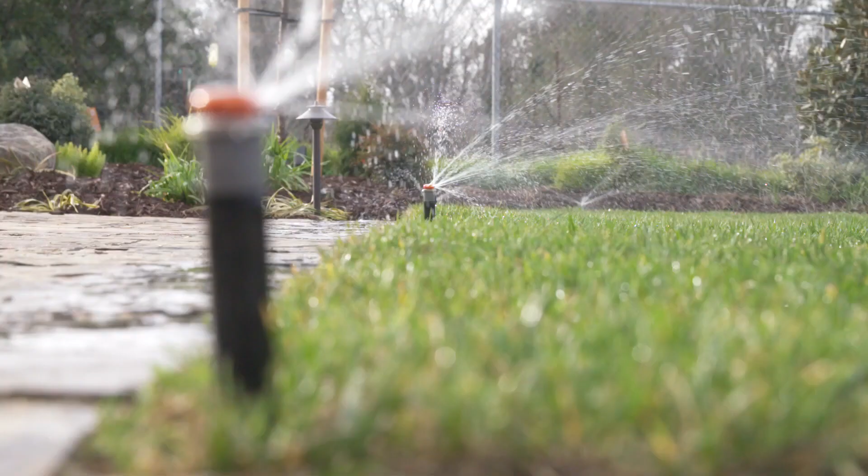A professional automatic irrigation system is designed to ensure different plant types get the correct amount of water they need. Automatic irrigation systems save time by letting the technology handle the routine and time-consuming process of watering landscapes. A modern system saves money by adjusting watering schedules automatically when the weather changes.

A professional irrigation system prevents tripping hazards by moving the water throughout the property while being out of sight and out of mind, with no messy hoses laying around for someone to trip on. And being underground, the system of pipes and spray bodies are protected from seasonal weather and routine maintenance.

The main reason for having an irrigation system is to help provide a beautiful landscape. This can increase property value and have a positive effect on your quality of life. Now, let's go through and identify the components of an irrigation system. An irrigation system is comprised of many components. Each component serves a unique purpose in the functionality of an irrigation system.

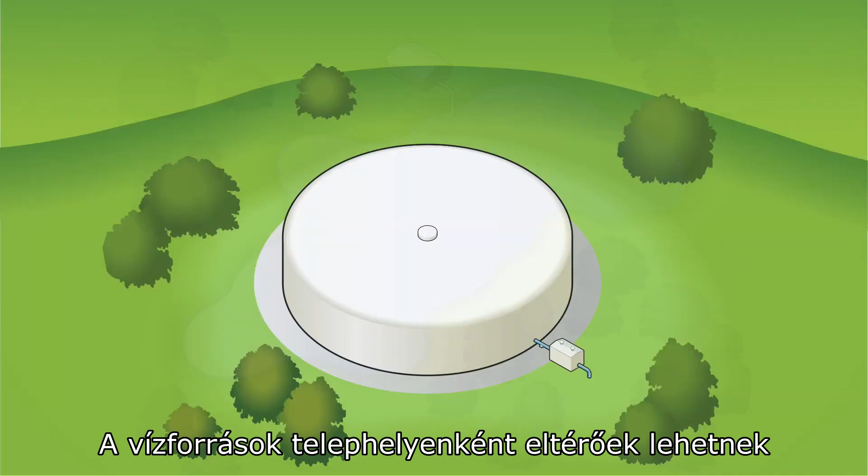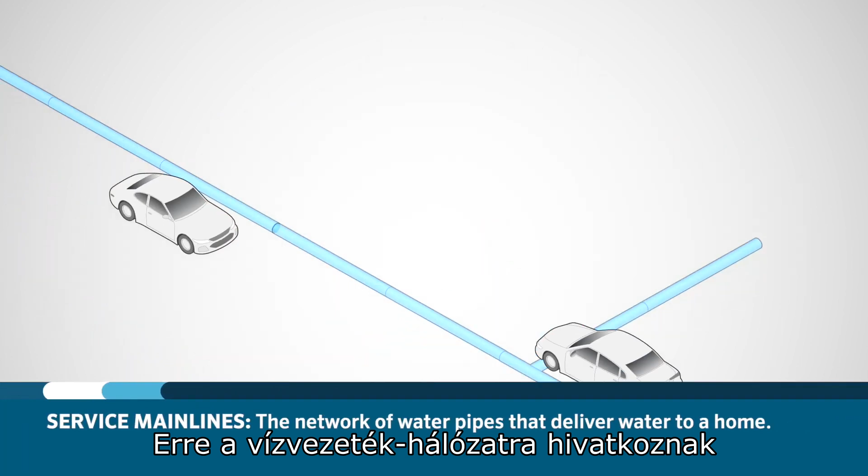All irrigation systems require a water source. It may seem obvious, but it will be very important to know where the water is coming from, so make sure to verify the water source before beginning your installation. Water sources may vary from site to site and region to region. The water source might be delivered in a network of pipes that run under the roads that we drive on every day. This network of water pipes is referred to as service main lines.

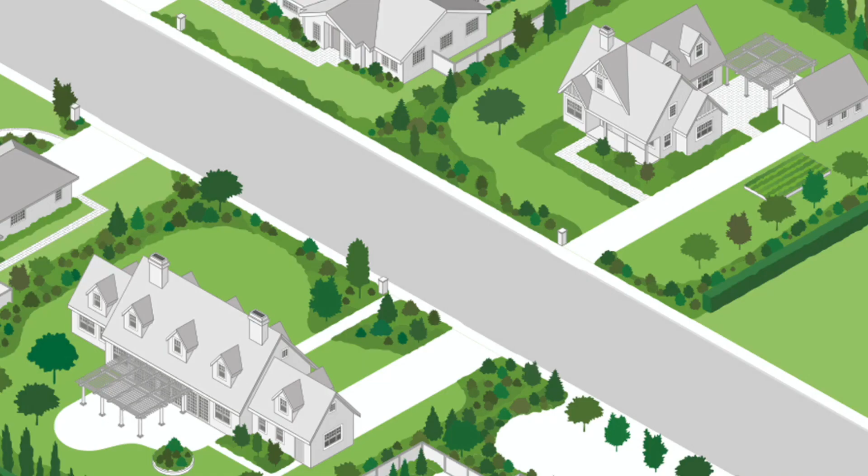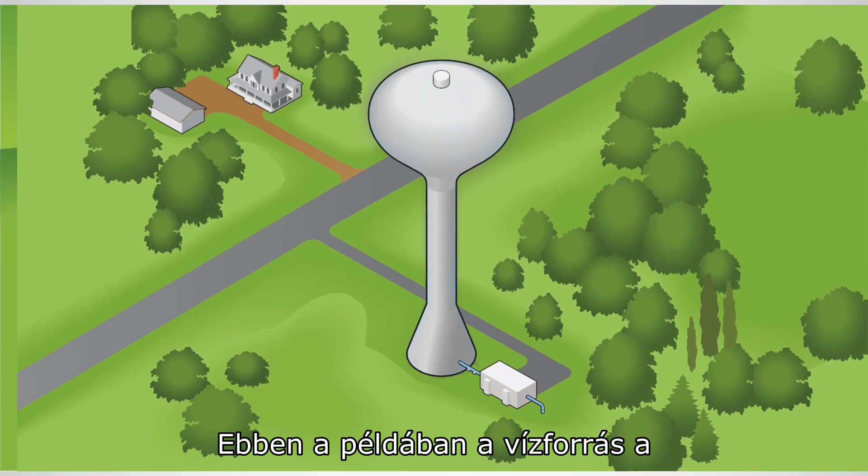Water can also be pulled from the ground or surface water sources like ponds, lakes, streams, and rivers using pumps to create the pressure needed to operate the sprinklers. You may have a municipal connection, like a metered potable water service or a metered recycled or reclaimed water service. In this example, the water source is a municipal metered potable connection.

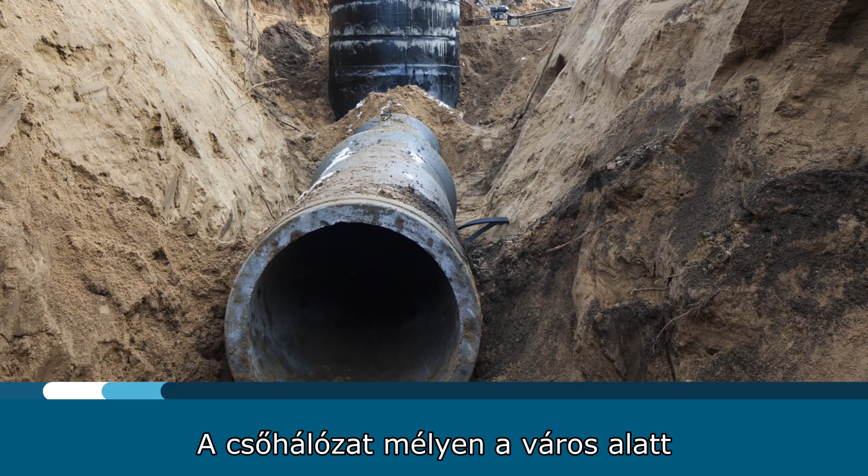With a municipal supply, pressure is created in the water supply lines by pumps or by gravity-fed supply tanks on hilltops or water towers you see throughout cities. These are maintained by the supplying agency. The network of pipes deep under the city or county roads service homes, commercial properties, and fire hydrants. These pipes are usually very large and typically range from about 2 to 36 inches.

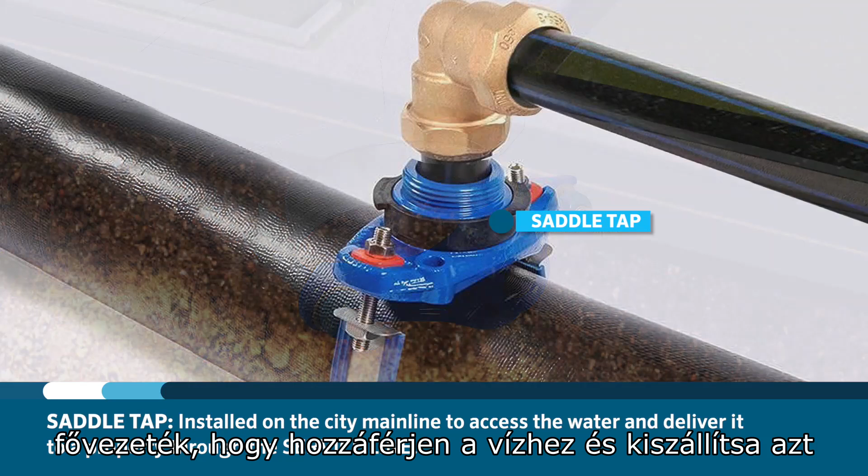These are called municipal main lines and may often be referred to as city main or main line. A saddle tap is installed on the city main line to access the water and deliver it to a property through the service line.

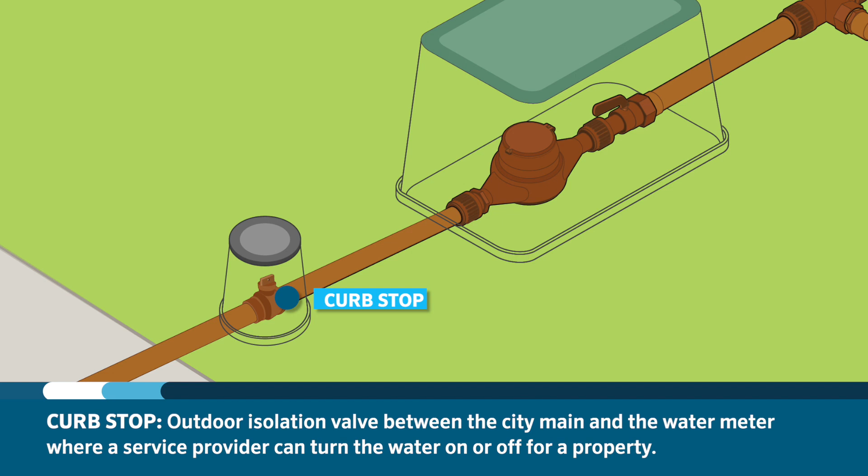Between the city main and the water meter, you may find a curb stop. A curb stop is an outdoor isolation valve where the water provider can turn water on or off for a property. This is usually found in a valve box just inside the property line. In cold weather climates, this valve is deep in the ground below the frost line. The water then passes through the service line to a water meter.

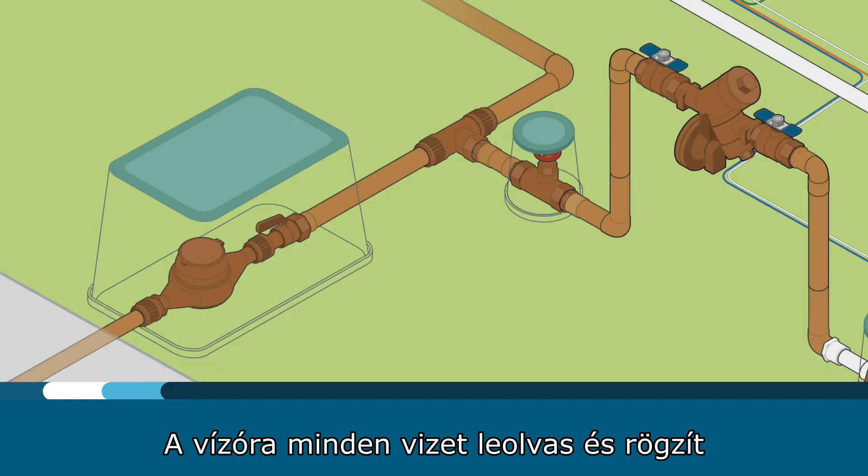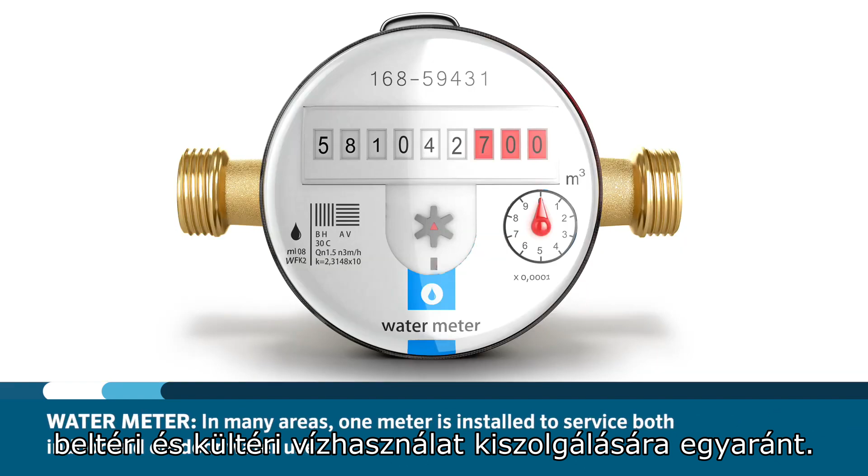So what is a water meter? The water meter reads and records all water being used on the property. Before the water can be used on the property, it must pass through a water meter to track the quantity of water used inside the building or out in the landscape. In many areas, one water meter is installed to service both indoor and outdoor water use. Other areas may require installation of 2 water meters, one for indoor use and one for outdoor use.

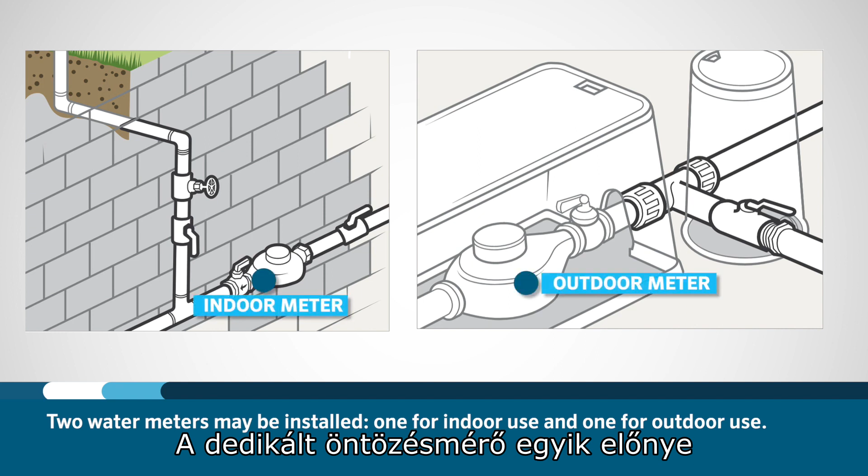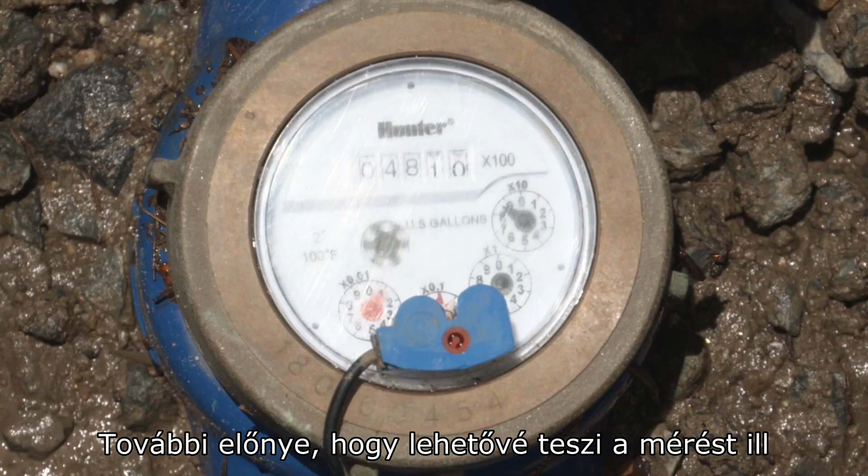One advantage to having a dedicated irrigation meter is to eliminate costly sewer fees commonly incurred with indoor water use meters. This is because water that enters the home is assumed to leave the home and go into the sewer system, and water used by the outdoor irrigation system is assumed to stay in the landscape. Another advantage is that it allows measurement and therefore better management of landscape water, maximizing efficiency and helping to ensure a beautiful and healthy landscape.

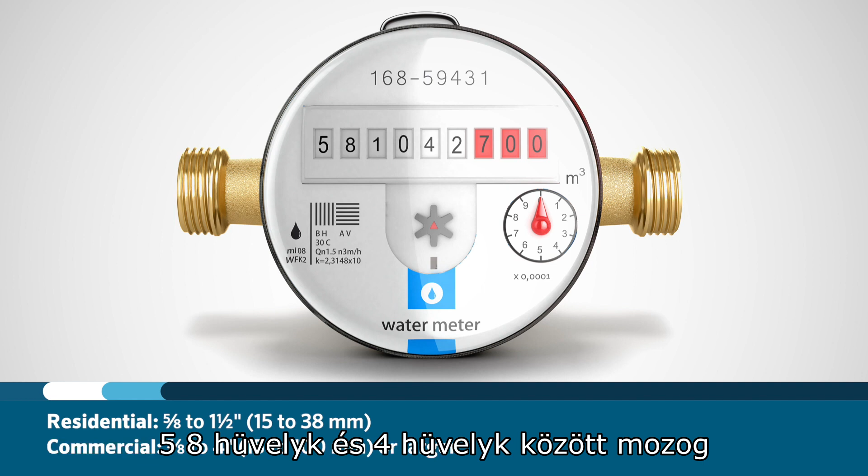Meter sizes range from 5/8 inch to 1.5 inch for residential properties and can range from 5/8 inch to 4 inches or larger for commercial irrigation systems. A typical warm weather installation will have a meter box where water comes from the city main through the water meter to the delivery line.

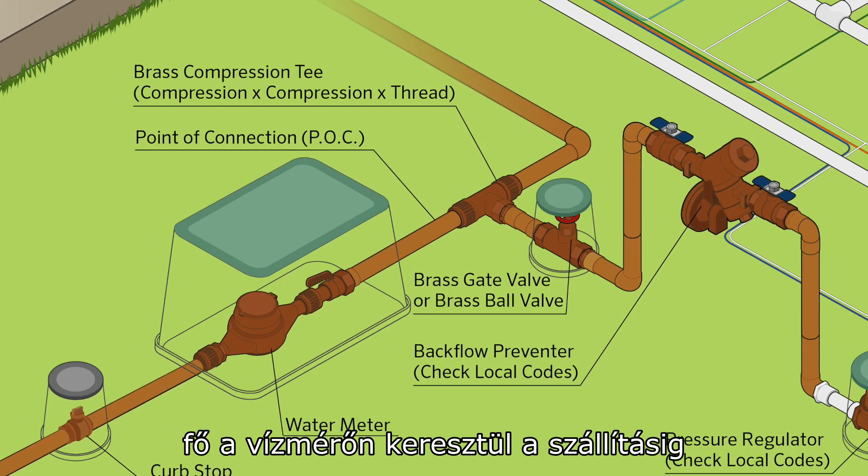For cold climates where freezing temperatures are likely, the water meter may be placed inside the building. After the water meter, the water moves through the delivery line to provide water to the house or building.

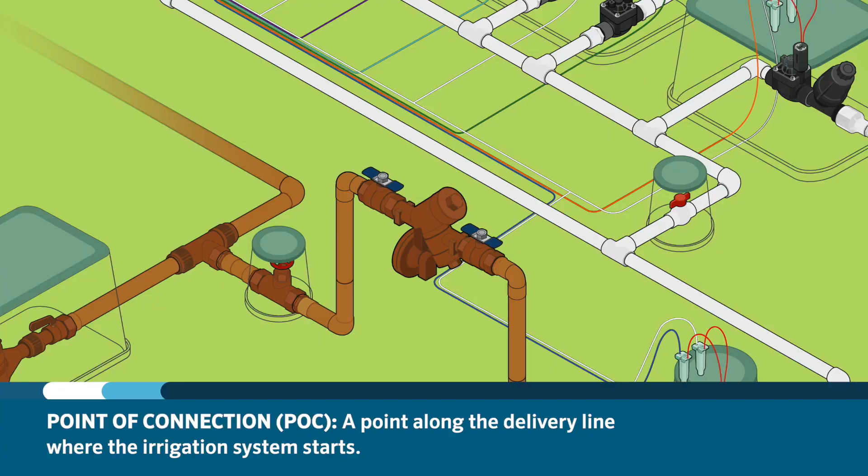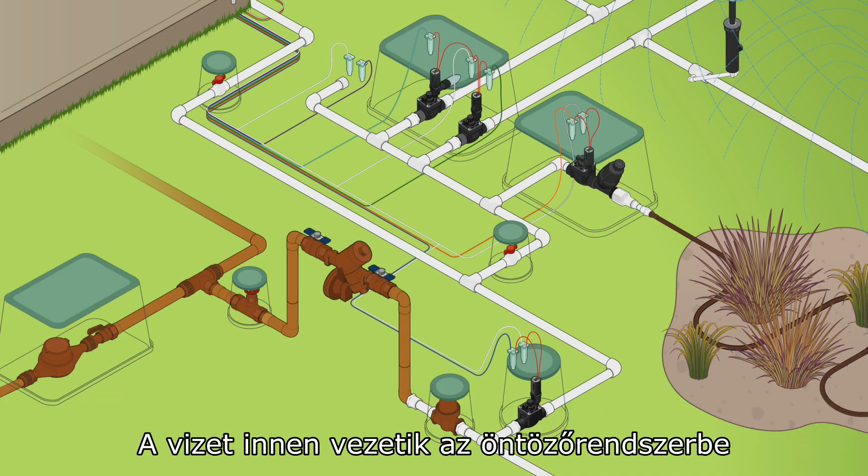A point along the delivery line is chosen to be the point of connection or POC for the irrigation system. Typically, this is where the irrigation system starts. Water is directed to the irrigation system from the delivery line that supplies water to the home or commercial building. This will be different if the irrigation system has a dedicated water source separate from the meter to the home.

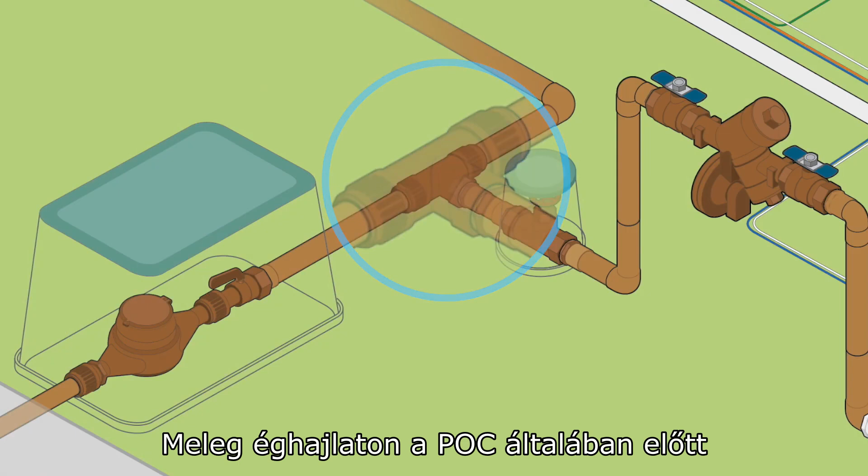In warm climates, the POC is usually before the building, and in cold climates, the POC could be inside the building. At this point, a compression or slip tee is installed at the POC. The tee can be made of various materials. Check your local codes for the appropriate type used in your area.

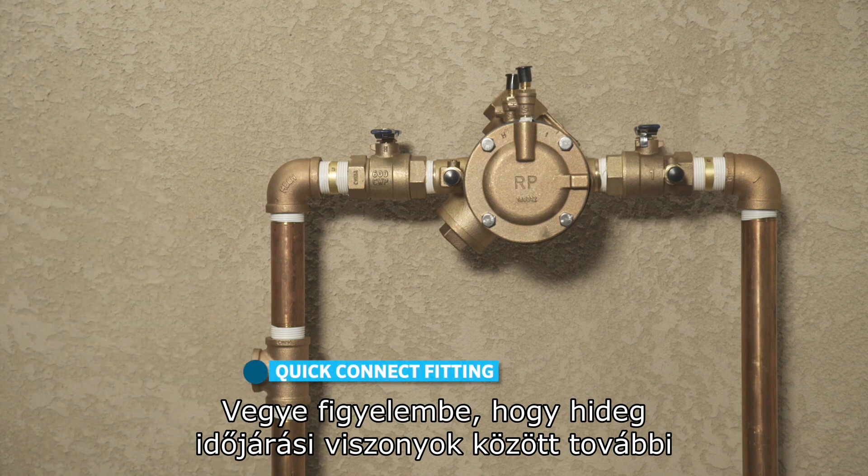Note that in cold weather climates, an additional quick connect type fitting and drain valve should be added to the point of connection for winterizing the irrigation system.

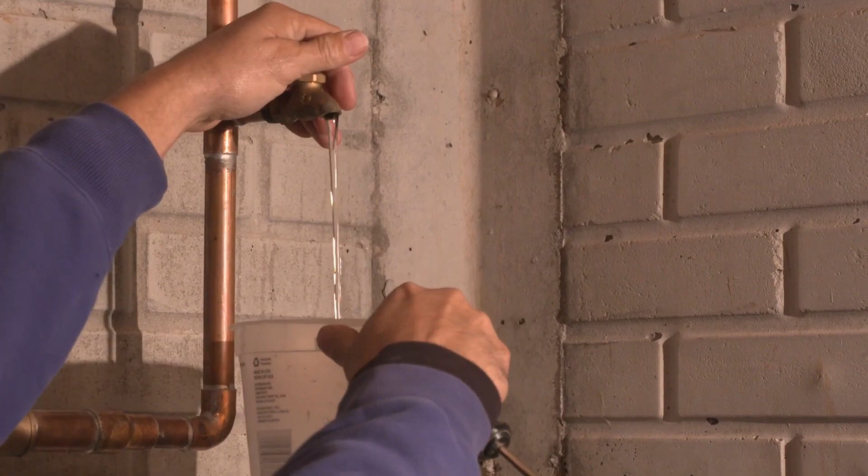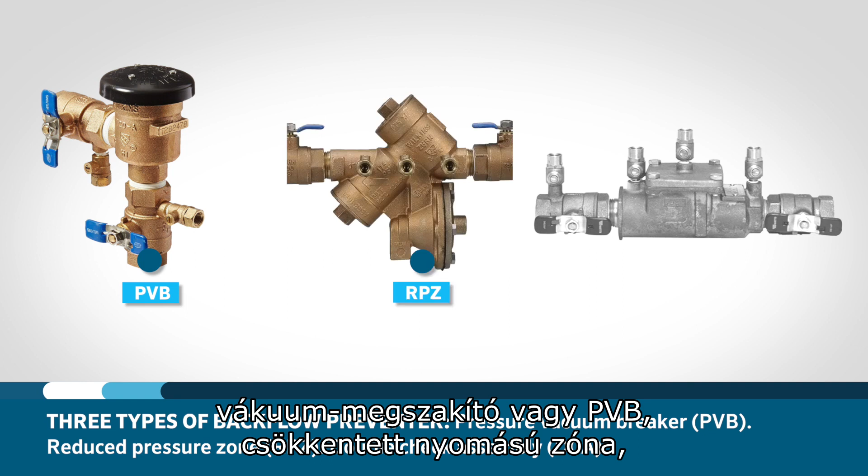Most cities require the use of a device known as a backflow preventer to prevent contamination of the potable water source by ensuring that no water that has been directed to the irrigation system can make its way back to the delivery line or municipal service line. The three most commonly used are a pressure vacuum breaker or PVB, a reduced pressure zone or RPZ, and a double check assembly or DCA.

After water passes through the backflow prevention device, internal check valves prevent water from flowing in the opposite direction. The installation of this device is often required by local code and typically requires a licensed professional. Check your local code to determine which backflow prevention device is required for your system.

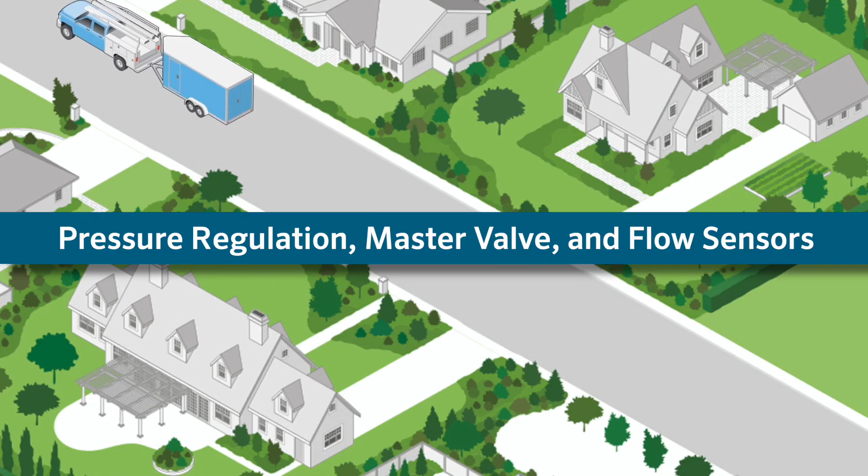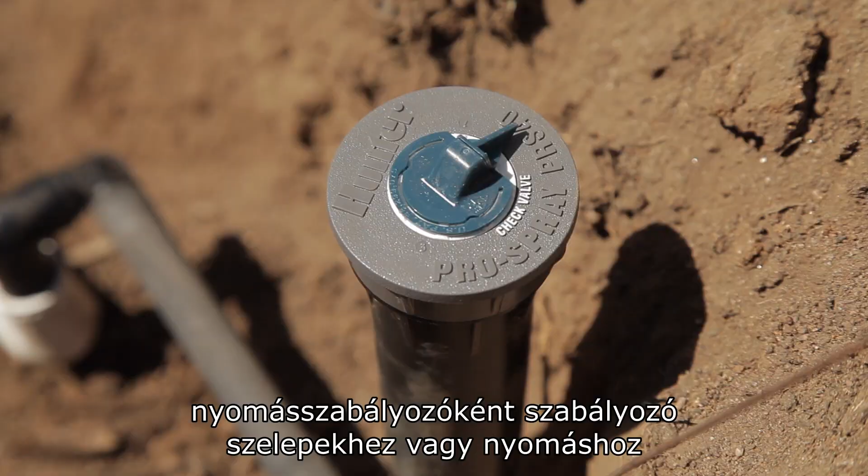After the water meter and the backflow preventer, there might be a pressure regulator to regulate the pressure to the entire system. A pressure regulator should be installed if the incoming pressure is much higher than the system requires. There are other products that can be used in the system to help regulate pressure, such as pressure regulators for control valves or pressure-regulated sprinkler bodies, but those should not be a substitute for pressure regulation at the point of connection.

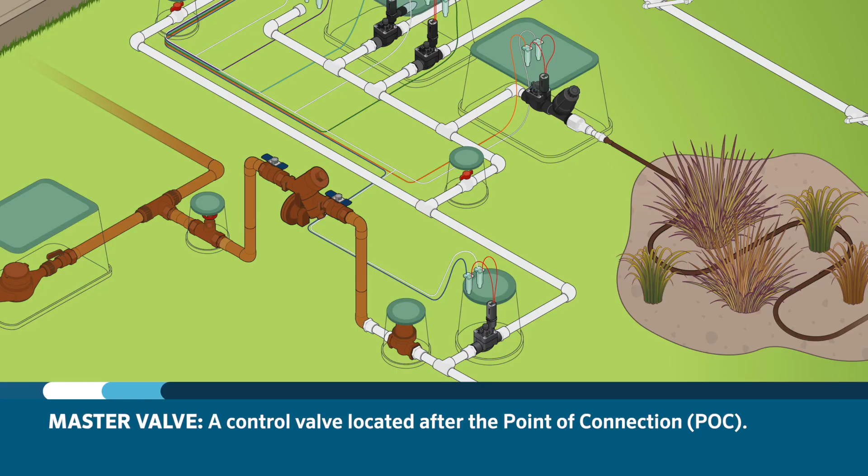After the pressure regulator, an optional and highly recommended device known as a master valve can be installed. The master valve, in most cases, is simply a control valve located after the POC. There are both normally open and normally closed master valves. Since a normally closed master valve is the one most commonly used in smaller irrigation systems, we will be referring to that type during this training.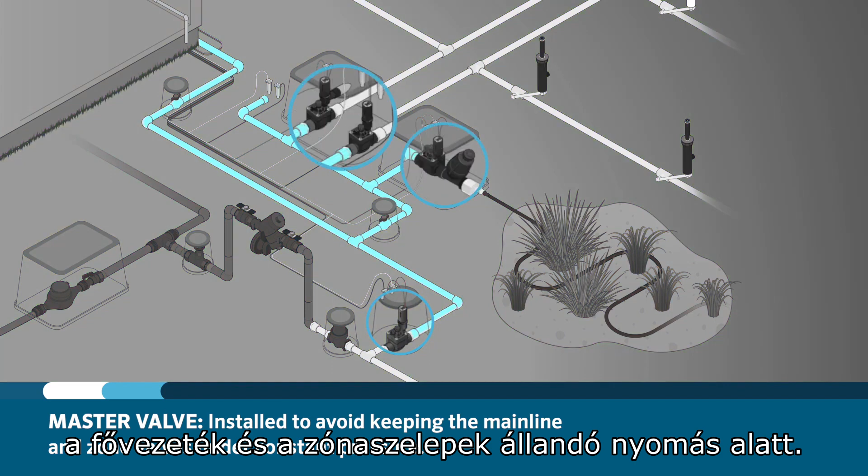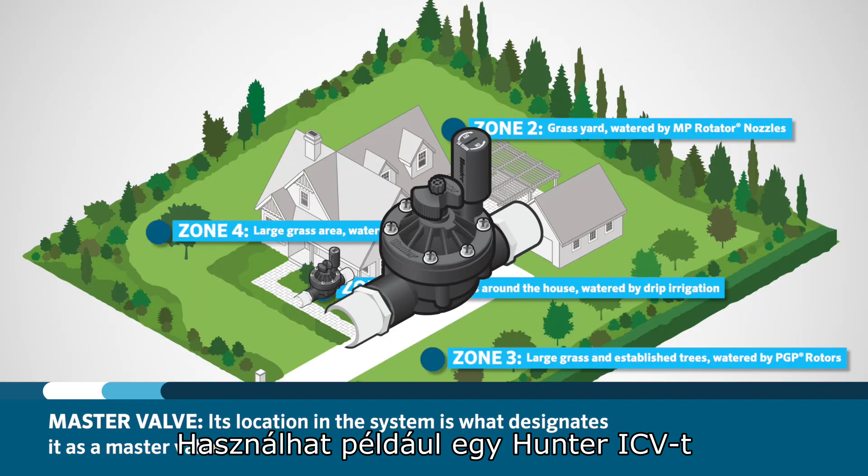A master valve is installed to avoid keeping the mainline and zone valves under constant pressure. We do this to prevent damage to the property created by irrigation mainline leaks. Its location in the system is what gives it the designation of master valve. For example, you may use a Hunter ICV for both a station valve as well as a master valve. The master valve must activate simultaneously with any station valve for water to flow through the system.

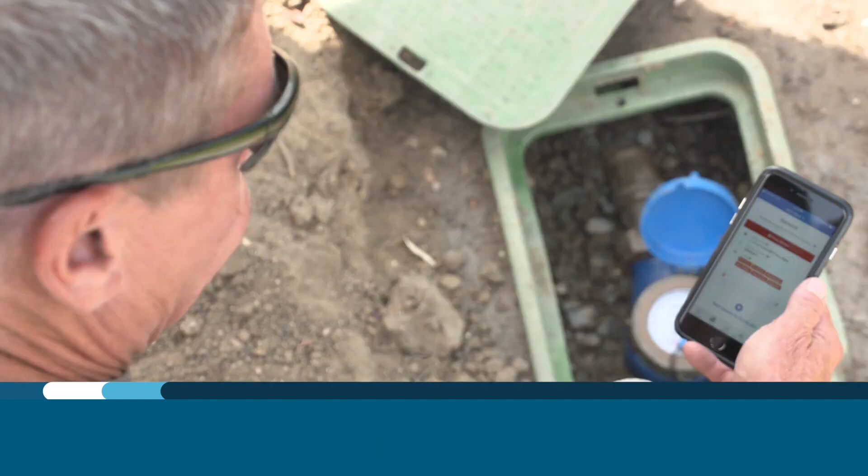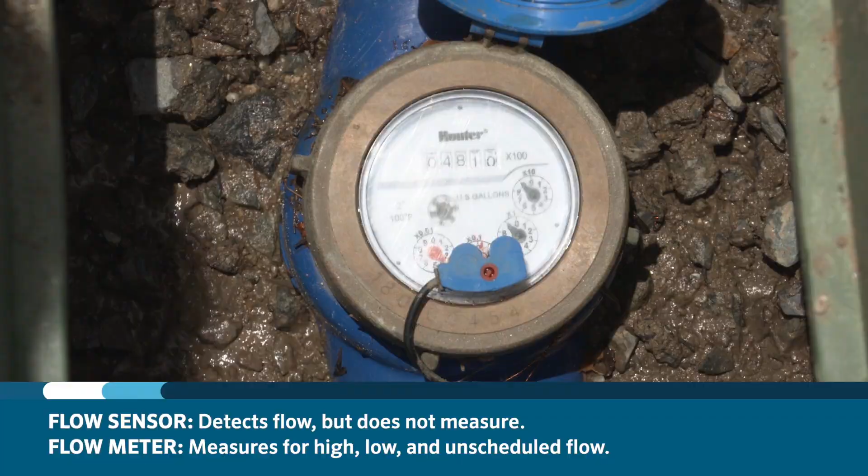Another highly recommended device, known as a flow sensor or flow meter, may be added to the system to monitor for high, low, and unscheduled flow. A flow sensor or flow meter, in combination with a master valve, can help to identify failures in the piping system and shut down the system, preventing water waste and high water bills.

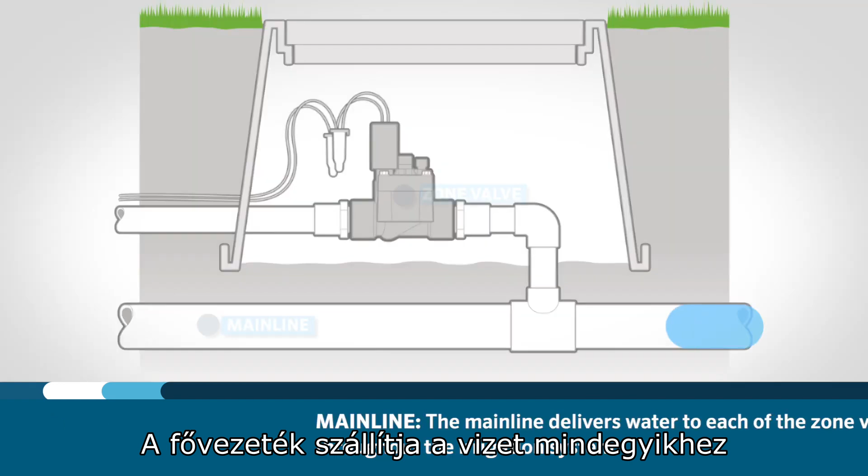Downstream of the master valve and flow sensor is the sprinkler mainline. The sprinkler mainline is the largest pipe in the irrigation system. If there is no master valve, this pipe is typically under constant water pressure at all times throughout the entire site 24/7. The mainline delivers water to each of the zone valves throughout the irrigation system.

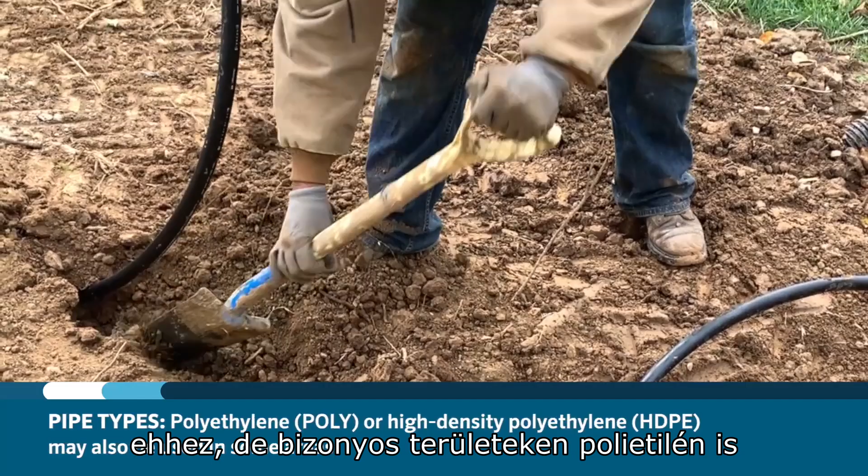PVC pipe is the most commonly used pipe for this, but in some areas, polyethylene, also known as poly, or high-density polyethylene, or HDPE, might be used. If a normally closed master valve is installed, the mainline only remains under pressure during scheduled irrigation cycles.

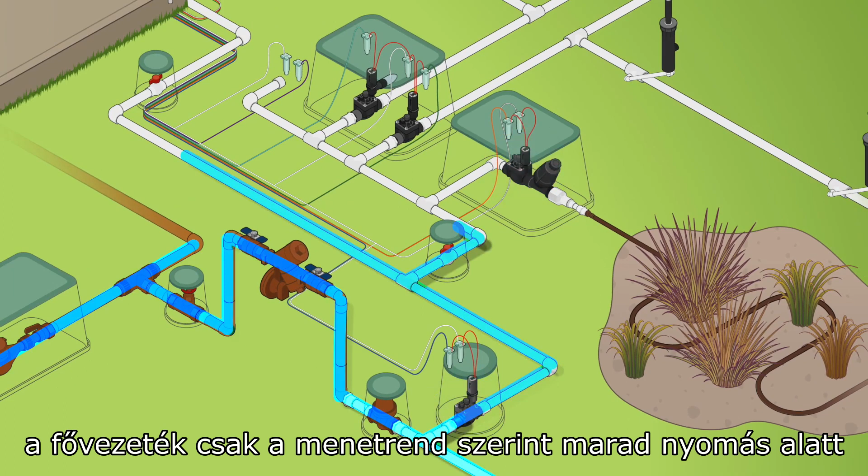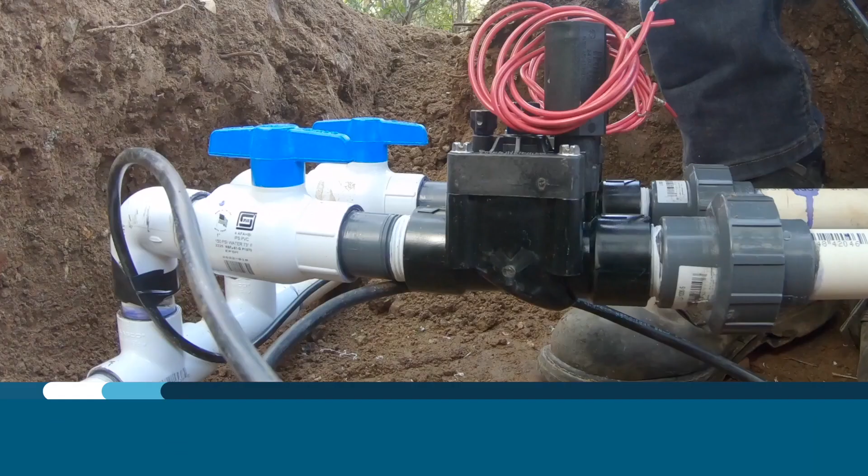Along the mainline and before the valve manifolds, it's recommended that shutoff valves be installed to isolate sections of the system for maintenance and troubleshooting. These are generally the same size as the line they are on. They can be made of PVC or brass depending on the system design and specifications.

The mainline connects to the valve or valve manifolds. Valve manifolds are a grouping of valves that control water flowing through the zone or stations on a property. Sometimes these are called automatic control valves, remote control valves, or electrical zone valves. Electrical zone valves are installed to control the water flow to the sprinklers in each zone.

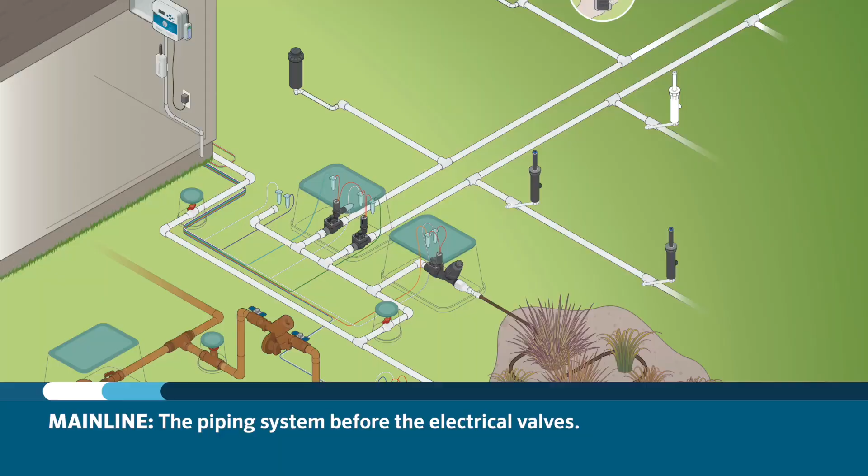Only when the controller sends a 24-volt alternating current electrical signal to open the particular valve will that valve open and allow water to flow from the main line through the lateral lines to the sprinklers or emitters. The piping system before the electrical valves is referred to as the main line, and any pipe system after the electrical valves is referred to as lateral lines.

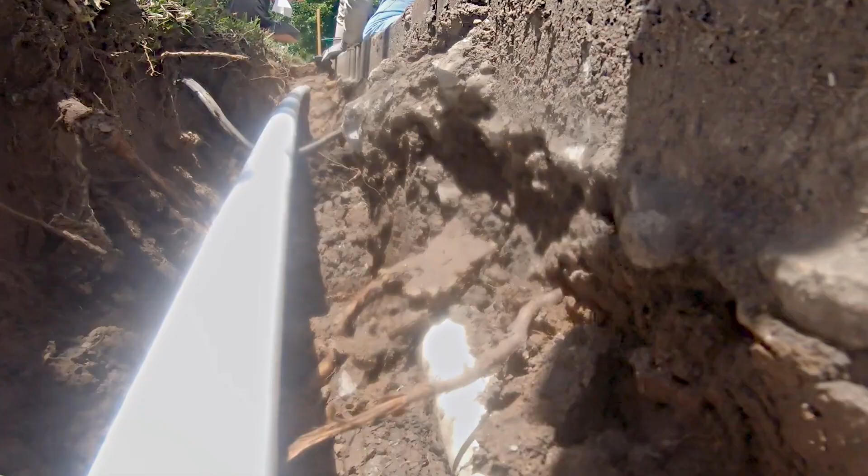Lateral lines connect all the sprinklers on one zone and allow the water to flow from the valve to the sprinklers in the zone. When the valve opens, the lateral line fills up with water and the sprinklers pop up, or the drip lines are filled with water and build pressure to activate the emitters.

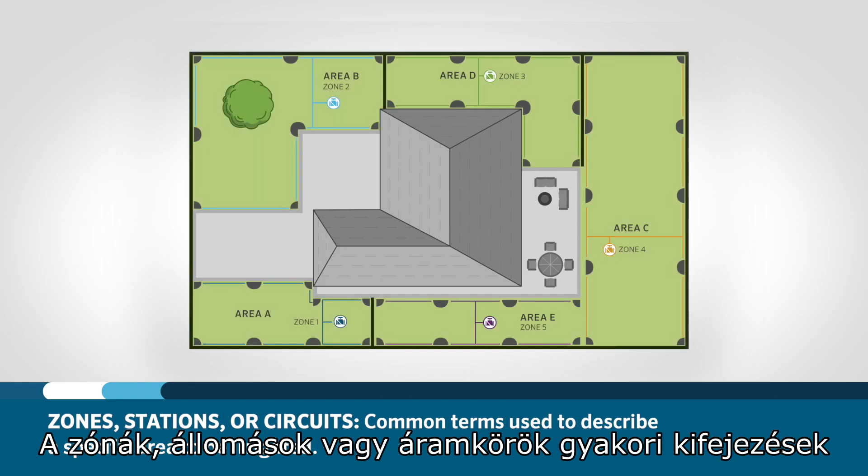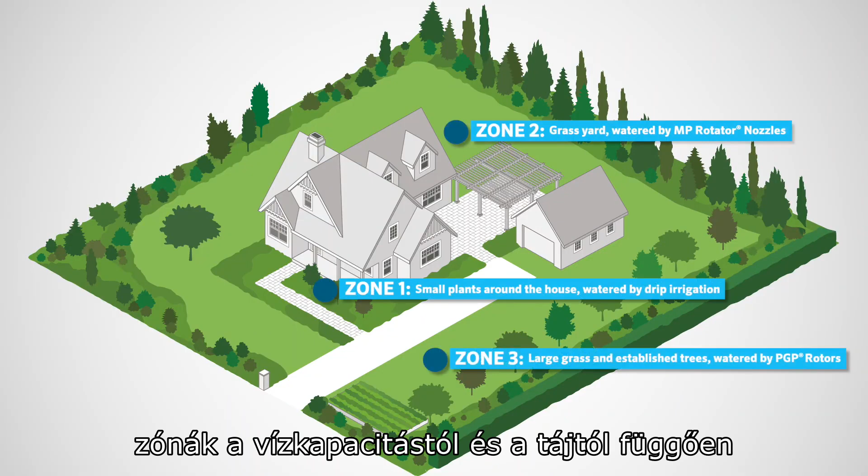So, what is a zone? A zone is an area with similar plant material, sprinkler types, and sun exposure. Zones, stations, or circuits are common terms used to describe a specific area to be irrigated. In this training, we will use the term zone. Areas throughout the property are divided into multiple zones depending on water capacity and the landscape needs. Each zone will have its own valve, lateral lines, and emission devices.

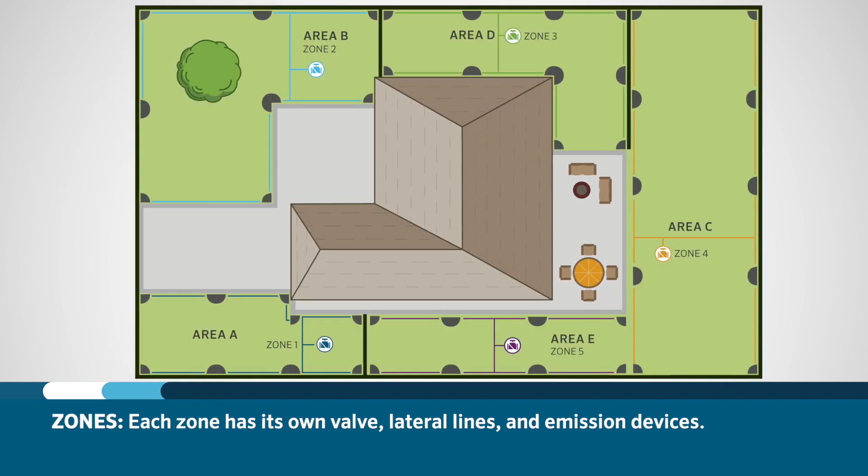Emission devices include, but are not limited to, bubblers, drip, MP rotators, and rotors like the PGP or I-20. The type of device needed is dependent on the size of the area and plant material to be irrigated. It is also important to consider available water pressure and maximum available flow when considering an emission device or other components.

Valves don't just operate on their own. They operate open and closed to allow or stop water flow via a 24-volt alternating current electrical signal sent on a wire from a controller to the solenoid on the valve. The controller is the electrical device that sends the 24-volt signal to the valve that is programmed to open.

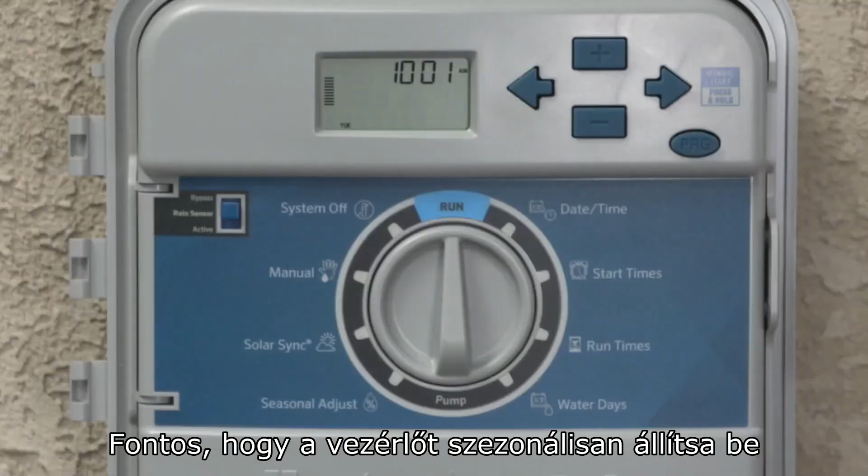The controller hosts the programming for the irrigation system. Once the controller is properly set to automatically irrigate the landscape, only minor adjustments should be necessary. It's important to adjust your controller seasonally to maximize water savings for your customers. Some controllers use weather data received from the internet to change the schedules based on the climate conditions.

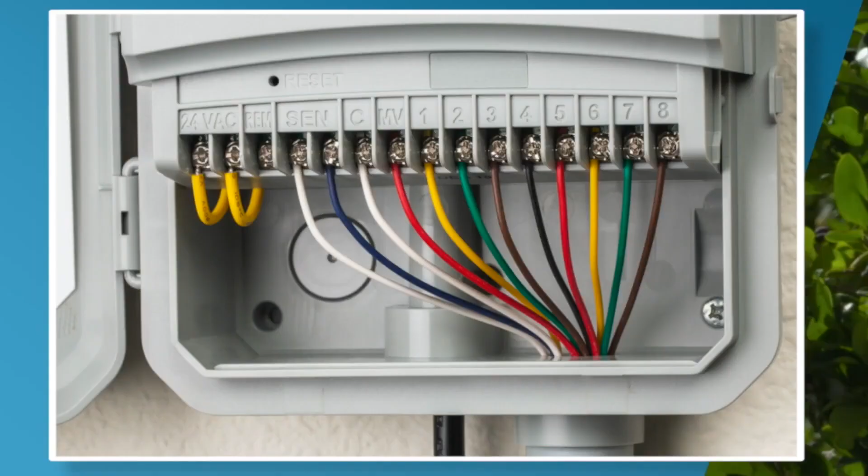The controller is connected to the electrical zone valve through insulated heavy-duty wires. The valve has two wire leads coming out of the solenoid. One is known as the hot, the other is known as the common. The hot wire from each valve is directly connected to each of the individual station terminals at the controller, while the common wire is common to all stations.

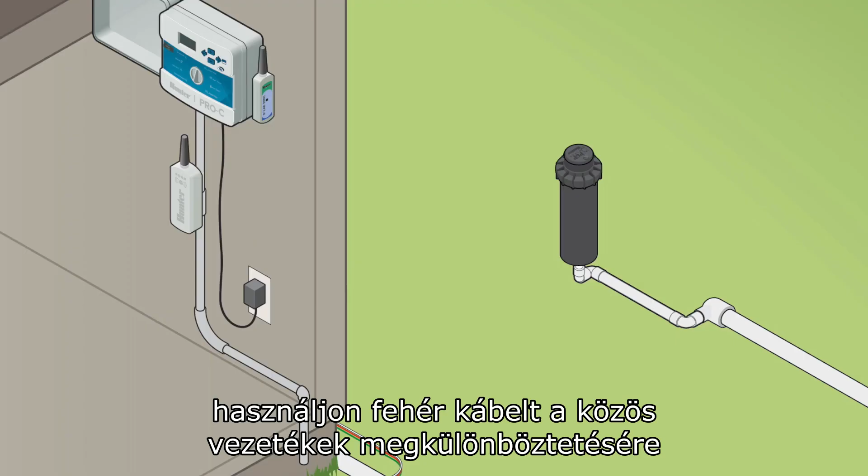A common practice in the industry is to use white cable to differentiate common wires from the rest of the colored hot wires. This is connected at the common terminal at the controller and goes out to the field where all valves get connected to the single wire.

So we have the piping system moving water through the property and a controller that runs the programs operating the valves. The valve sends water through the lateral lines to their zones where water is emitted by a device like a spray or a rotor. Let's describe what these different water emitting devices are called and how they get water into their zones.

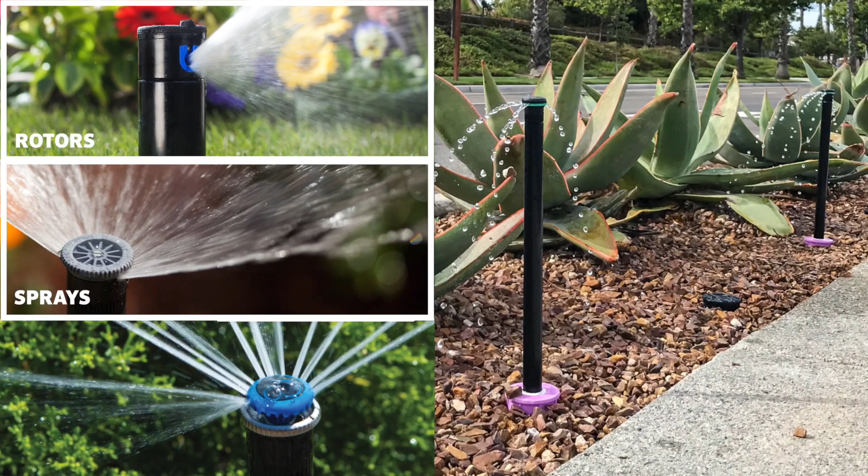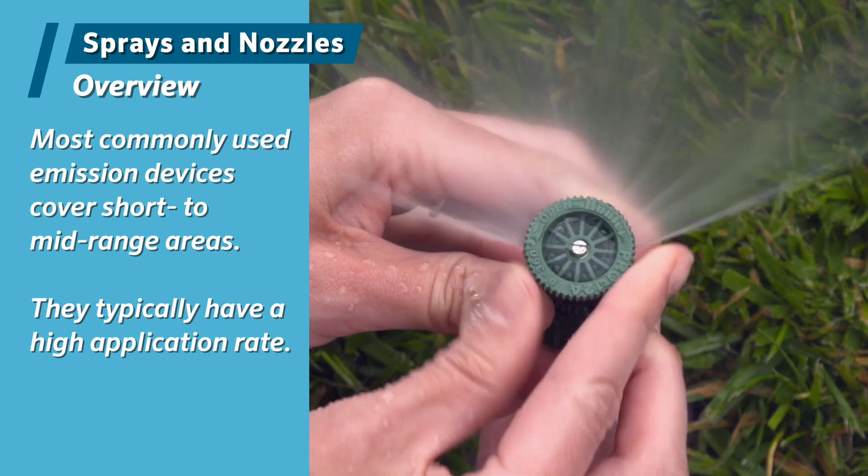When water is available to the sprinklers or other emission devices, they irrigate the designated area. Pop-up sprinklers include rotors, sprays, MP rotators, and bubblers. Other emission devices include point source or inline drip irrigation. Pro spray heads cover short to mid-range areas between 2 feet and 17 feet and apply water at a relatively high application rate. Spray heads have been the preferred method of overhead irrigation of smaller spaces for decades.

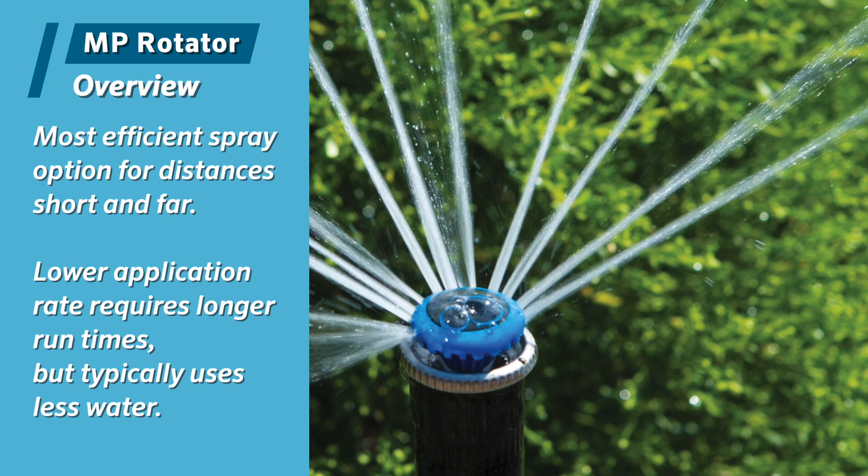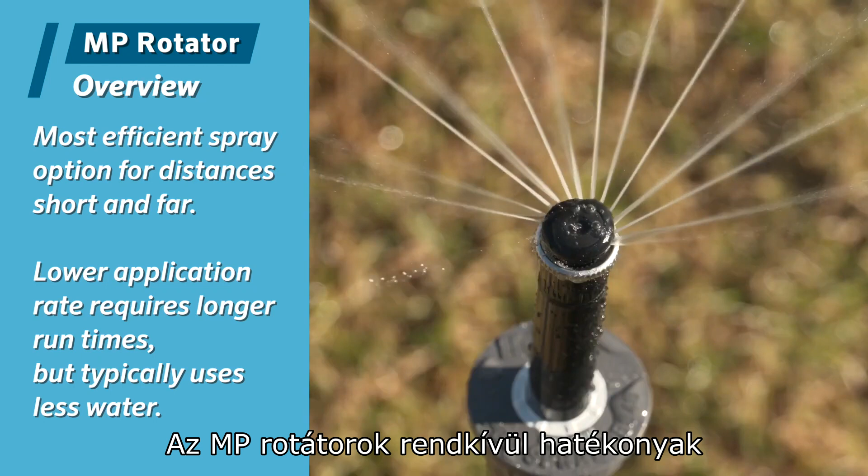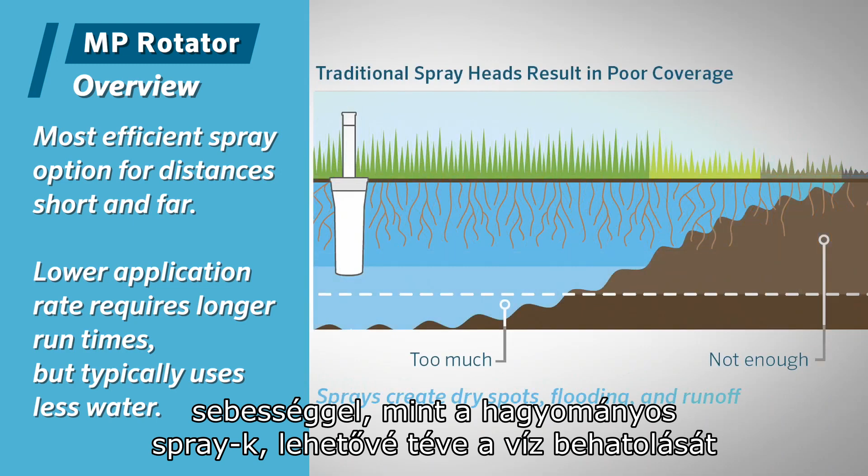MP rotators are another form of overhead irrigation designed and used in short to large radius areas from 6 feet to 35 feet. MP rotators are a type of highly efficient rotary nozzle that fit on pro spray bodies and shrub adapters. MPs apply water at a much slower application rate than traditional sprays, allowing water to penetrate and move through the soil before it runs off the target irrigation area onto hardscapes.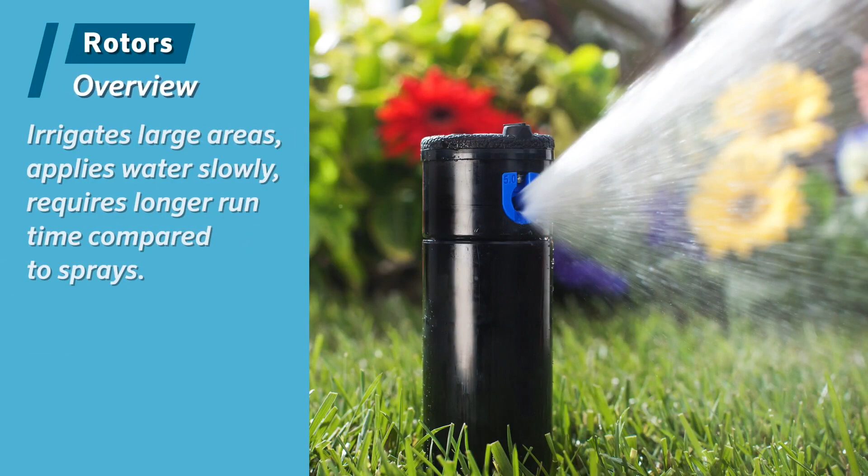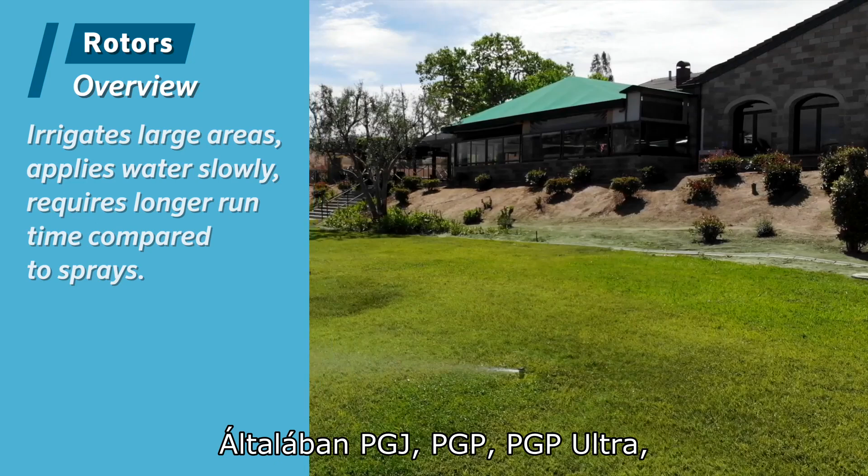Rotors are known to be a large area type sprinkler and have a radius range from 15 to 103 feet. You will typically use PGJ, PGP, PGP Ultra, or I-20 for these large areas in residential or commercial applications. Rotors apply water very slowly and tend to be considered more efficient than sprays, but will require longer run times to adequately irrigate a given area.

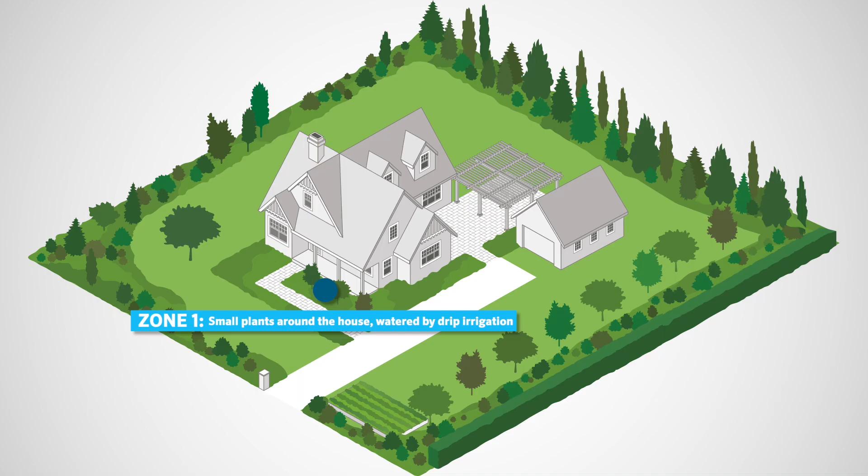In this example, Station 1 is a PCZ drip control zone kit that includes a filter and pressure regulator. It's important to use a filter and pressure regulator when installing micro-irrigation components, as they require lower operating pressures and have small openings that could become clogged with debris in the water. Refer to the Hunter catalog or Hunter website for a full list of micro-irrigation products.

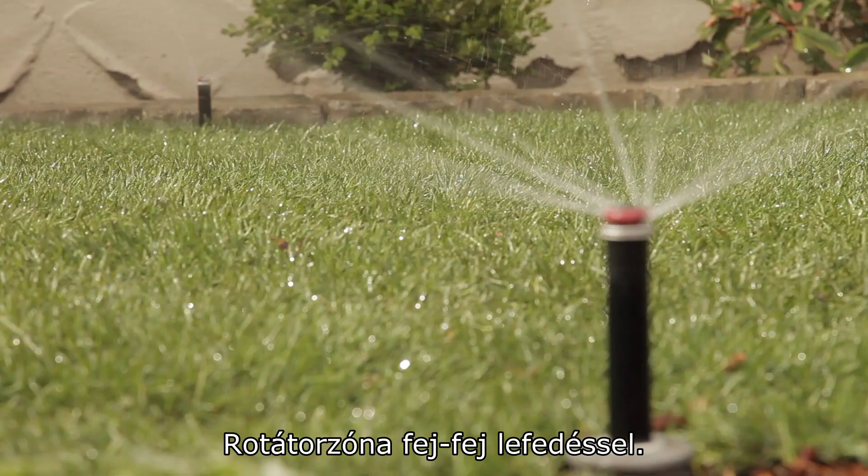Station 2 is an example of an MP rotator zone with head-to-head coverage. Head-to-head means that the heads are spaced so that one head's water throw reaches the adjacent head. Head-to-head spacing results in even coverage of water so that all plant material in the zone receives the same amount of water.

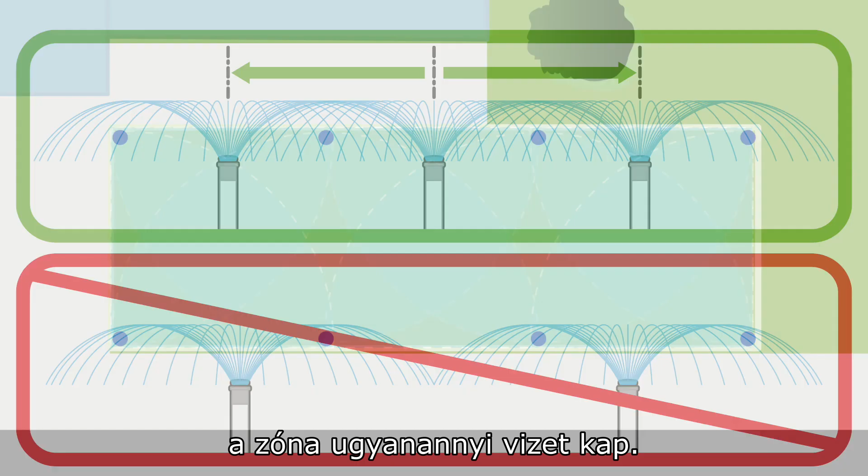It's important to note here that no other sprinkler types are being used with the MP rotator, and only similar plant material is being irrigated. This is an example of a station with proper hydrozoning. Remember, a hydrozone is an area of similar plant material being irrigated by the same type of emission device. Station 3 is an example of a gear-driven rotor zone. You'll want to use the same brand and type of rotors and select the proper nozzles. This is also an example of a station with proper hydrozoning.

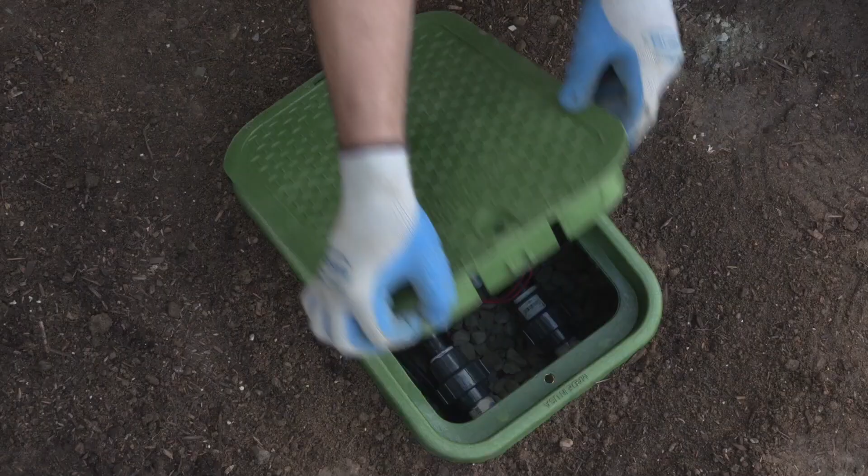To activate any of these valves, a 24-volt alternating current electrical signal is sent to the valve from the irrigation controller. The signal is sent through a set of station control wires to open the valve solenoid, which allows water to flow through the valves, through the lateral lines, and then to the sprinklers or irrigation devices. The flow sensor or flow meter will receive its own set of wires separate from the valve wires.

There are a number of accessories that can be used in an irrigation system, such as rain sensors, remotes, pressure regulators, etc. For this introduction, we are focusing on the main components that make an irrigation system functional. More information about these products will be discussed throughout the rest of the videos in this series.

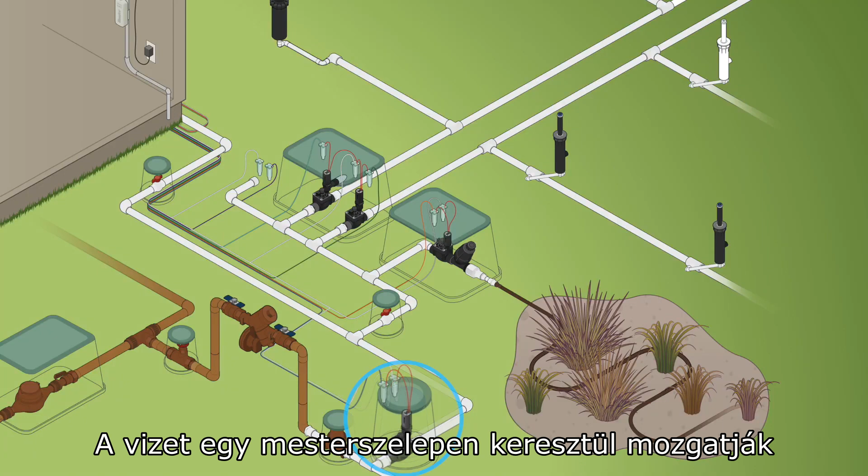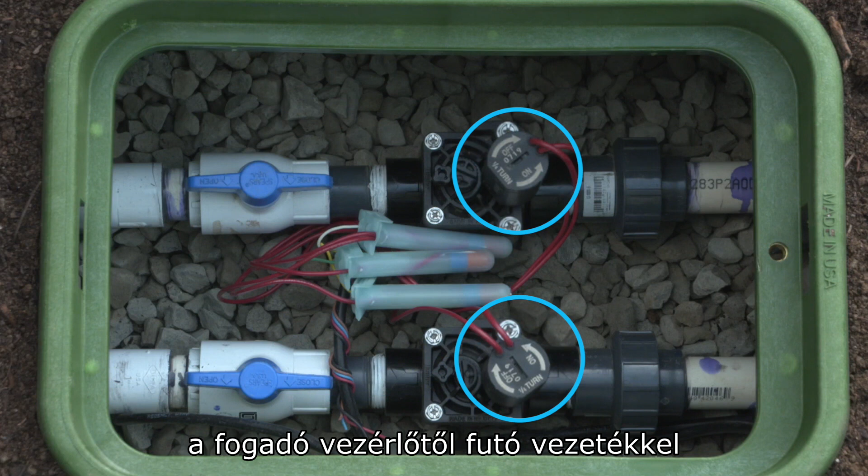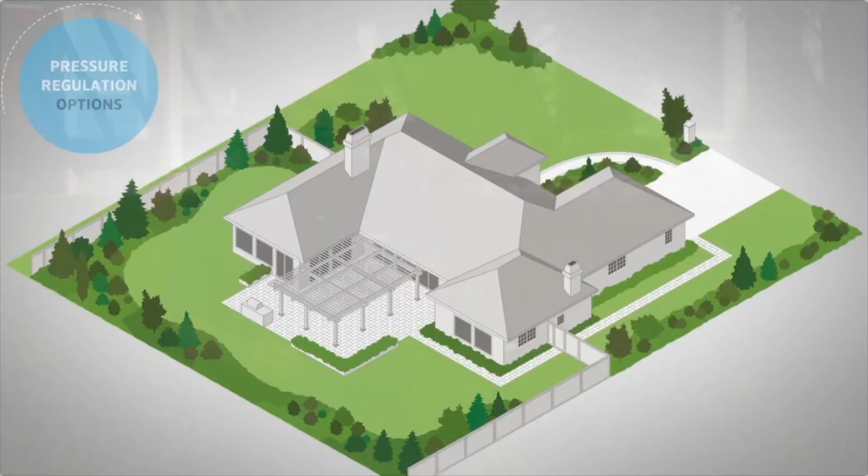To recap, an irrigation system begins at the point of connection from an incoming water source. The water is moved through a master valve to a main line that then makes its way to a valve manifold group of zone valves. Each zone valve has a solenoid on it with wire running from the controller that receives an electrical signal to open and close the valve, allowing water to reach its zone of sprays, rotors, or drip products that irrigate different parts of the landscape. Because different zones might need different water pressures, some valves are pressure regulated, while in other zones the pressure regulation may occur at the sprinkler body.

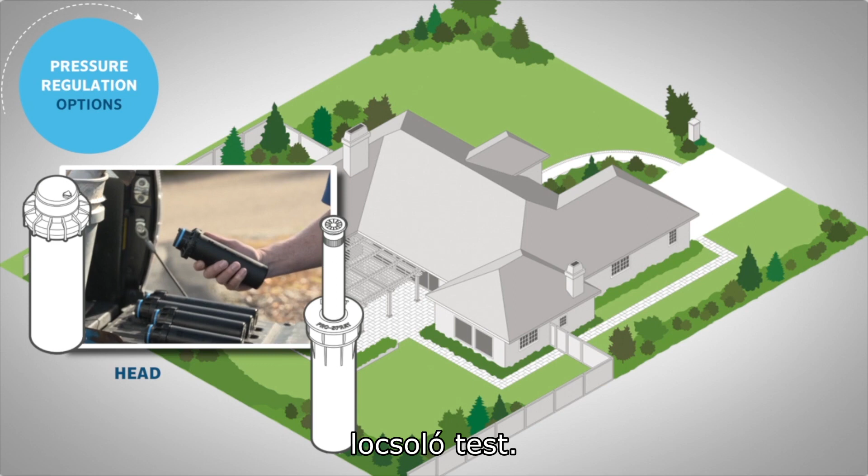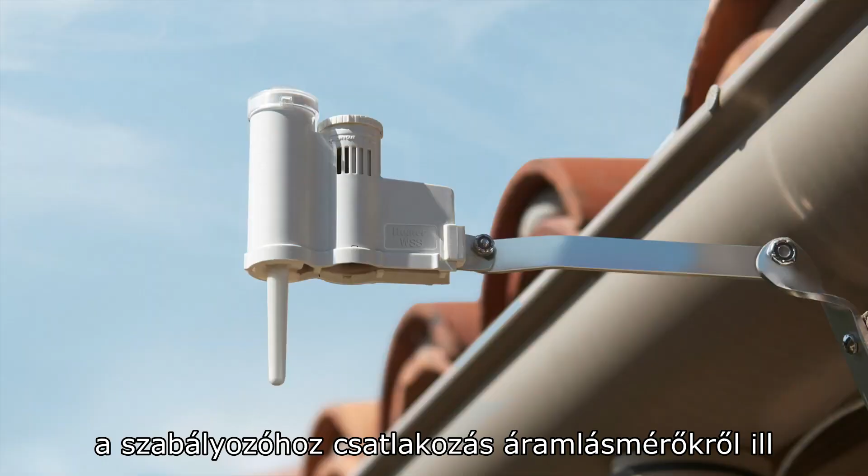Different climates and areas dictate different irrigation practices, such as performing winterization of the system or different sources of water supply. Automatic irrigation systems are controlled by irrigation controllers, which send electrical signals to the valves to run a zone, and they may have wires connecting to the controller from flow meters or weather sensors that tell the controller information or to adjust or suspend irrigation. These many parts and devices make up an irrigation system. Once installed, routine maintenance and adjustments are recommended to ensure the system runs optimally for many years of use.